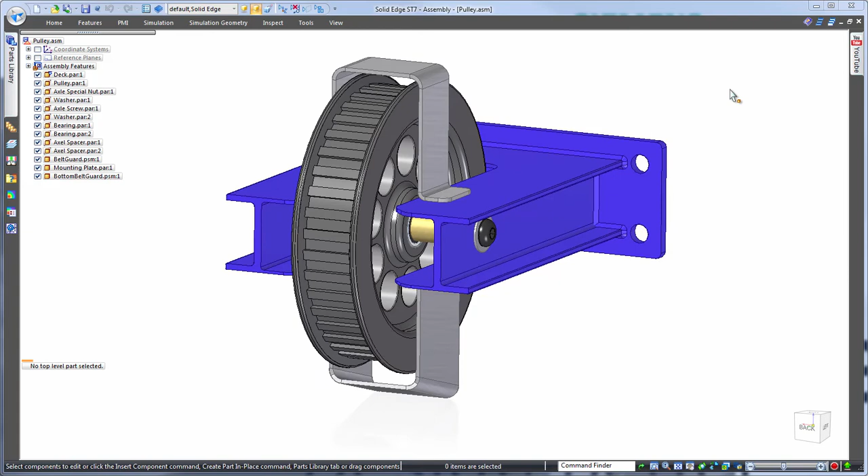Here we have a Solid Edge assembly of a custom pulley system where we want to make changes to the width to fit a wider belt. Of course, this means editing several components. First, we'll approach this as you would in most any other CAD system, using history-based editing. Then, we'll take a look at how synchronous technology can help us out.

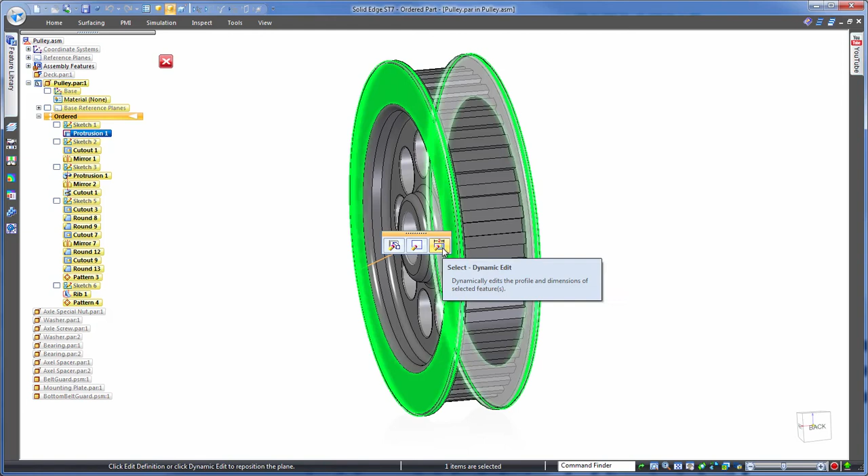So, history-based first, and let's start with the pulley itself for the initial edit. Notice the list on the left. This is the history-based recipe of features that make up this part. It can be tricky finding which feature is the one that we want to edit, however Solid Edge does assist us by picking up the relevant feature after we click on the model in the graphics area.

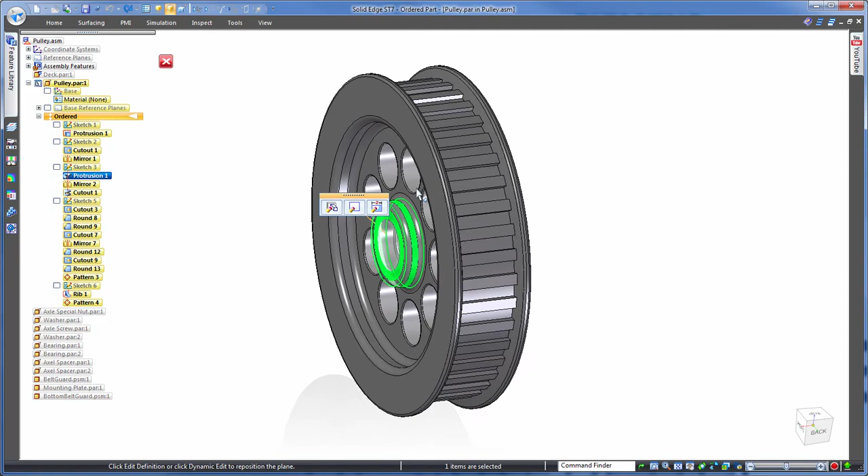So let's take this 35mm dimension and change that to 55mm. Simple. Oh no, wait. Because this is history-based editing, there are dependent features further down the tree on the left that this has caused issues with, damaging our model. So we need to go back and work out how we can make our desired width change another way. It turns out that we need to make multiple edits to not very obvious features in a particular order.

Okay, done. So, back at the assembly level, obviously the wheel is now wider, which means it's interfering with the other components. And we have some internal parts to deal with too.

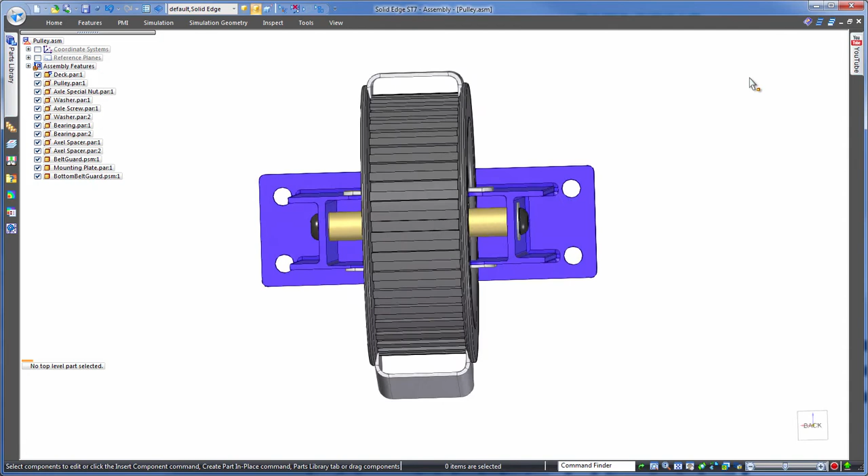Now to modify these, we could continue using a history-based approach, editing each individual part. However, this is time consuming, as you've seen. We could set up links between the parts so that a change in one part updates another, however this too takes time. We want something instant that doesn't have the overhead of interlinking.

So let's turn to synchronous technology. First, notice we're staying at the assembly level. From here we can simply pick a face and drag to edit. And Solid Edge is intelligent enough to know that this is a symmetrical part, so we probably want to keep it as such. But ideally we want to make several edits at the same time.

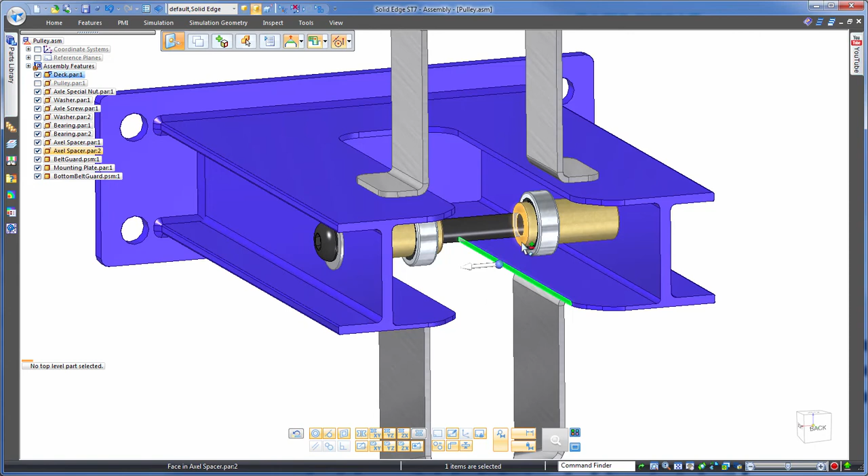Let's see how this works by selecting multiple faces from multiple parts. Here we can modify not just one, or two, or even three, but let's edit 4, 5, and 6 different aspects from 4 individual parts.

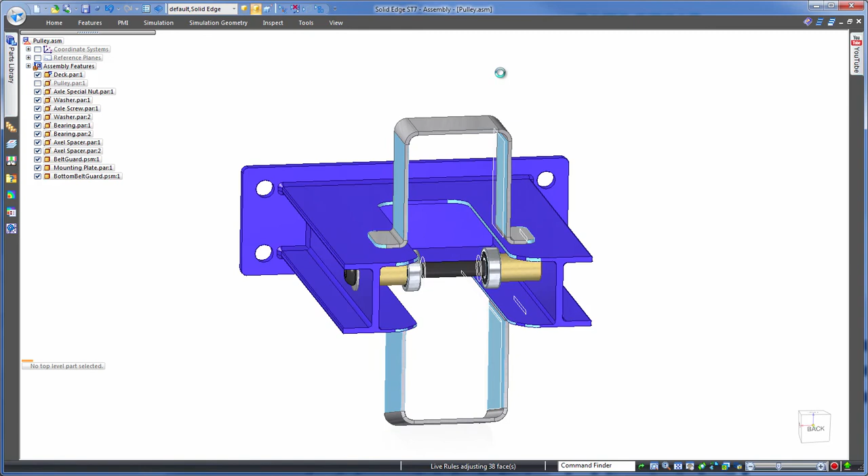And still, Solid Edge is automatically seeing that this design is symmetrical, so actually it's doing double these edits for us. And also notice how everything else is changing sensibly. Tangent relations and wall thicknesses, for example, are all being maintained. That's what we mean by one-shot multi-part editing.

Another way to make one-shot multi-part edits is by aligning faces, again all at the assembly level. Let's take the back side of these brackets and align those together. Nice and easy, just click the first face from one part, and the second face from the other part, and done.

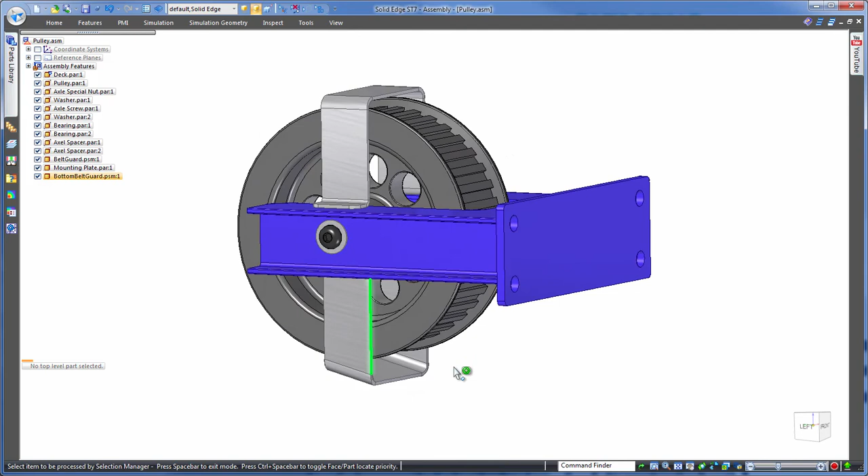We could even take this a step further by asking Solid Edge to find all of those coplanar faces that we've just been working with, and then get those snapped to this back face here. Just as easy, done. So there you have it.

No more in and out of each part with multiple time-consuming history-based edits, or even the need to interlink. Synchronous technology in Solid Edge allows one-shot, multi-part editing, all at the assembly level.